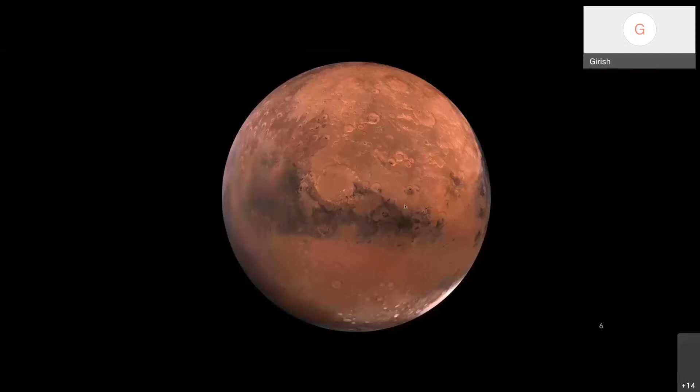But then in 2016, I started getting really interested back in this topic of sustainability and agriculture, primarily as a mechanism for helping sustainability. So if you ask me and my colleagues what we really are trying to do, we say we're trying to make terraforming robots. That's what we're trying to do.

People want to go to Mars, and NASA and Elon are all working on the rockets to go to Mars. But what we would like to do is create the AI and robotics technology that can help terraform Mars. But of course, we have to start here on Earth. There is a lot of terraforming that we need to do here right now.

The environment is in pretty bad shape, as you must have heard from many different sources. I'll try to explain a little bit about it.

Towards that goal, my group primarily works in field robotics, learning and autonomy, and we are a very diverse group of people from pretty much all the different departments on campus. What we work on is this idea of full stack autonomy - robots that can be autonomous in difficult field environments, which requires three types of autonomy algorithmic modules: control, perception, and planning. My group makes contributions across all three, and also with systems.

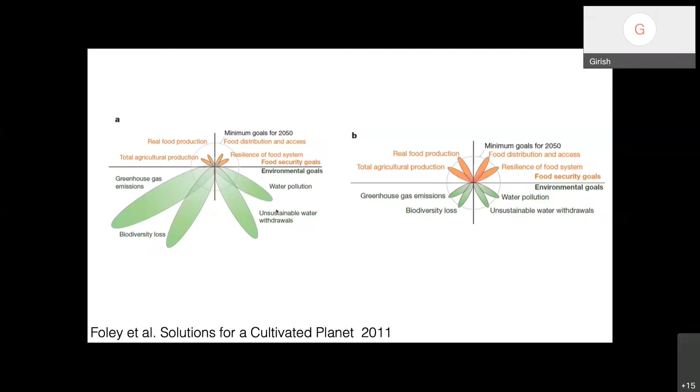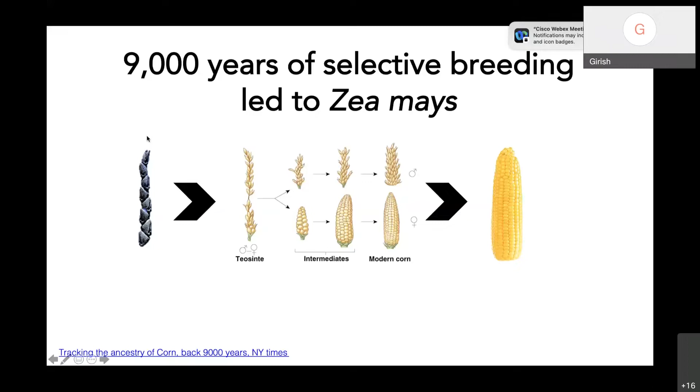But there is a very big need to accelerate the pace of this seed breeding right now, because in places like Africa and India, the yields are a third of what they typically are in more developed countries, and the population is actually increasing in those areas much faster. So how do you do that?

Geneticists and large breeding firms, industry in general, have been trying to implement methods like genome-wide associations. What happens here is they sequence all the genes of the plants of interest, and try to study the genotype-environment interaction. The genotypes express themselves as phenotypes. Phenotypes are visible traits of the plant, like plant height, plant width, how much yield it has, how resistant it is to certain diseases. And environment can include the natural environment, but also man-made things like chemicals and different management practices.

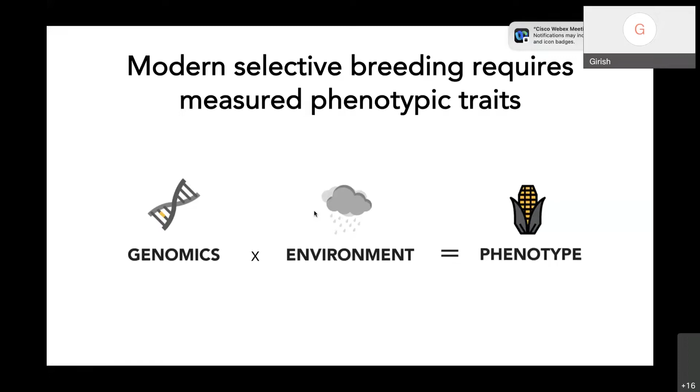Now the issue is that genotype sequencing is a solved problem now, but phenotype measurement is really not there. So what the breeders do is they plant these very large diversity fields.

They have to do this because there isn't a simulation model of the plant. So what they need to do is measure all of these varieties so they know which ones are doing better. From that perspective, there is a big bottleneck right now, called the phenotyping bottleneck, because all of these measurements are done manually. Not only are they time consuming, but they can often be inaccurate and literally impossible to make in some cases.

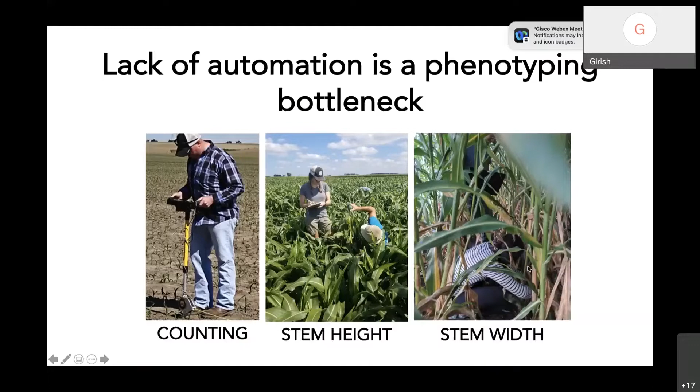You cannot go around and measure the width of stems of 40 acres worth of plants. It's simply not possible. So this has really slowed down the breeding pipelines. They could be much faster and much better.

In India also, there has been a lot of great work in plant breeding, especially in West Bengal. They have these varieties of wheat that can stay submerged underwater for 12 days. That's really cool, but all of this really needs to be accelerated with these types of measurements.

So how do you make these measurements? You can have gantry systems like this, which can potentially provide really high resolution and a lot of data, but they are limited in the area they can cover. Drones are really good, and they can cover a lot of area, but they don't really see under the plant canopy, which is where all the interesting action is happening.

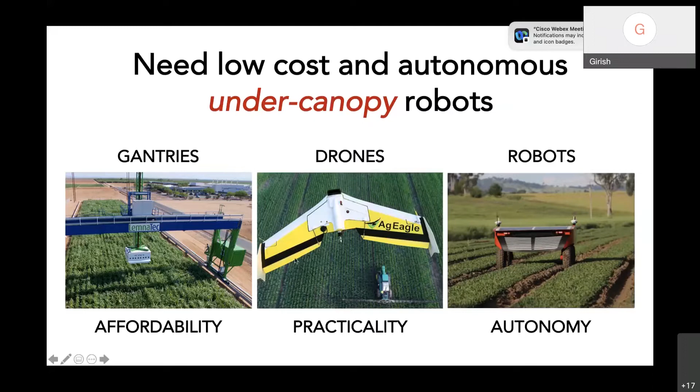So what we need is robots. And people have been talking about robots in ag since really early, since the 1980s. But the main issue, why we don't see robots everywhere in ag, is that the cost is simply too much for robotics today.

A part of that is the cost of making the robot, which actually should be less, in my experience, than the cost of making a diesel tractor, because you don't have a diesel engine. But the issue is really not that, it's the autonomy. You can make an electrically driven robot all day long, but if it is not autonomous, then it's kind of pointless.

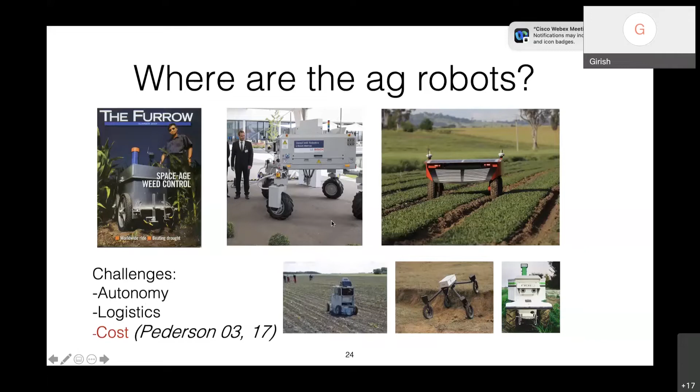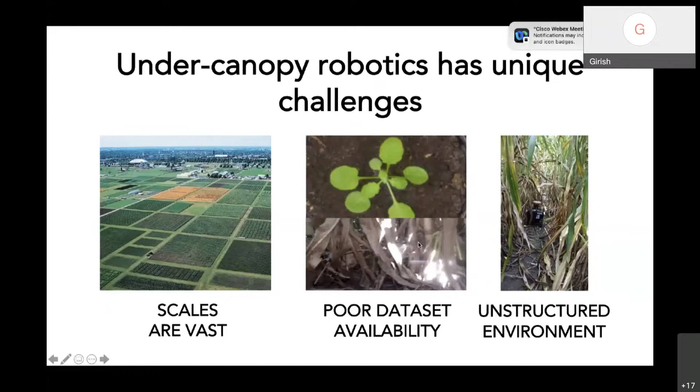And this autonomy problem is very difficult to solve because we have these very large fields. Data doesn't look very good when you are under the canopy, and these environments can be very unstructured. So since 2017, we pivoted from our drone work to try and solve these under-canopy robotics problems.

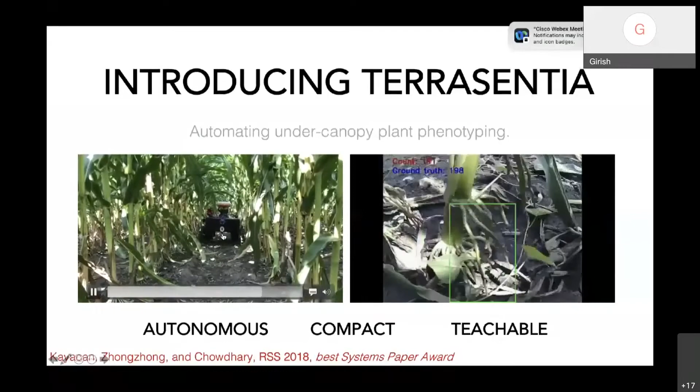In 2018, we had our first major paper in this area, which got the best paper award in the Robotics Science and Systems Conference, a premier robotics conference. The idea was that we can make very low cost under-canopy robots that are essentially 3D printed, and these robots can go and make measurements under the plant canopy that will be useful.

Let me explain the whole idea of this small form factor in robotics. In agricultural robotics, there typically has been a reliance on much larger robots. Like this one I'm showing is actually a smaller one, but many bigger robots have been there, and they have tracks, and people just try to replicate what large vehicles do in fields. But you see that they often have issues, like this one just ran over this sorghum right there.

So one of our ideas was to simplify this, and that came from our drone experience, where we said that if we could simplify these robots, then they will be easier to control. So in 2017, we came up with this idea of making a drone on the ground, a small lightweight robot that can skid to turn instead of having a complicated steering system. It basically just has 4 motors.

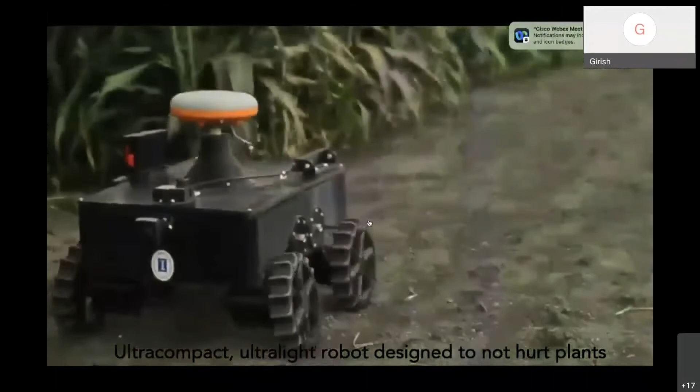Those are the only moving components. The rest is just electronics and sensors. This robot will give data that is at a very unique viewpoint compared to the data you can get from satellites or from drones.

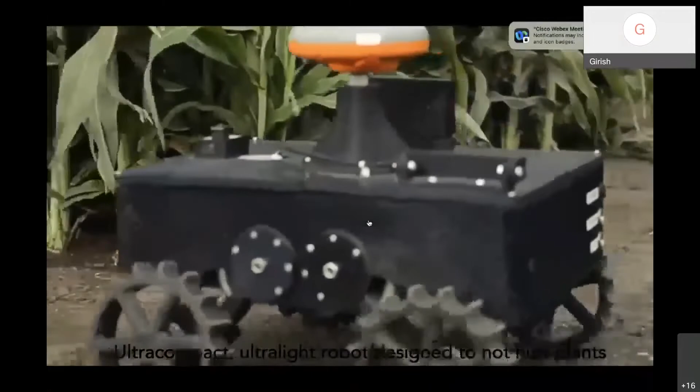Then what we did is we had a project back then called the TERRA-MEPP project, ARPA-E, which is like an advanced research projects agency, like a DARPA for energy. That project had a lot of focus on actually bringing technology to market and not just writing papers.

So what we did is EarthSense, which was already existing by then, which I had co-founded with my old friend Chinmay, pivoted to making these robots. We made 30 of these 3D printed robots and gave them to breeders and companies across the United States to ask whether this was a useful thing. They broke all the time because obviously they were 3D printed and not properly engineered per se, but the idea was to get the concept out and see if these robots made sense.

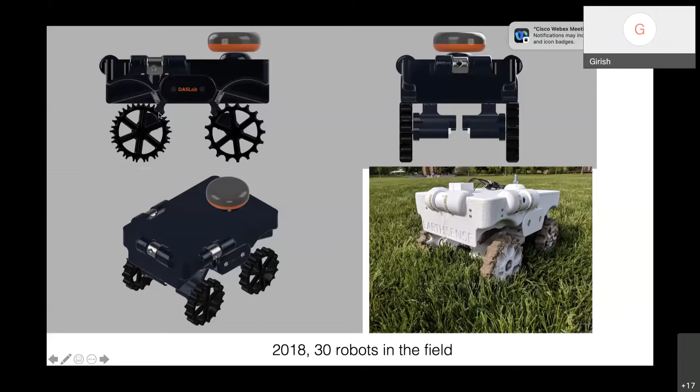We did believe that certain components could be plastic made, and we found out which could be and which couldn't be. And we did that in 2018.

In 2019, we basically went back to the drawing board and redesigned the whole system, making this monocoque chassis system where there's a plastic shell on top, a plastic shell on the bottom, and a metal shell in the middle, with metal struts that carry 4 brushless DC motors. Then every year we've been improving that. So that was the 2019 one.

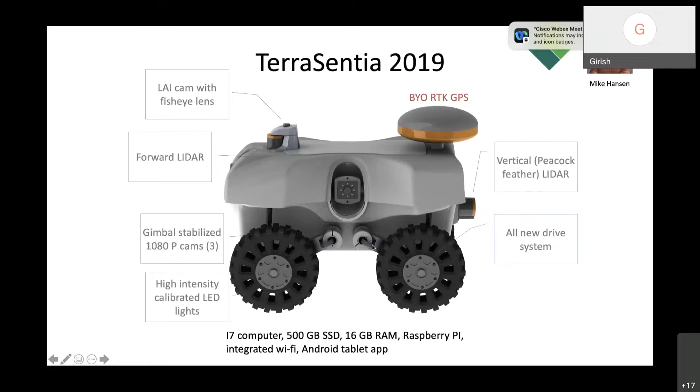In 2020, we refined the robot quite a bit. Actually, a number of these parts now get manufactured in India. The robot has 4 brushless DC motors, which I'll talk about in a minute. Along with that, it has 2 LiDAR sensors, 3 cameras, an RTK GPS receiver, and internally an i7 computer with lots of storage and another Raspberry Pi.

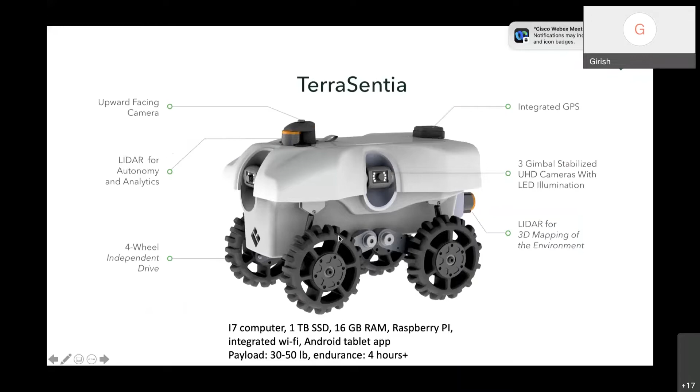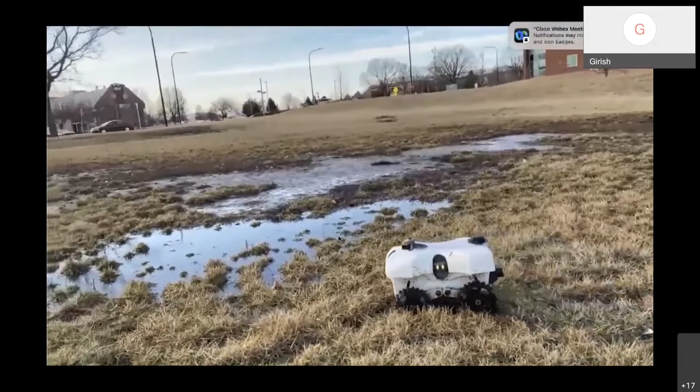So there are some innovations we made in creating this robot. The first was the shift to this drivetrain driven by brushless DC motors. These motors have become ubiquitous now because of the scooters you can buy for riding on the roads. At least in the US and Europe, this is very common.

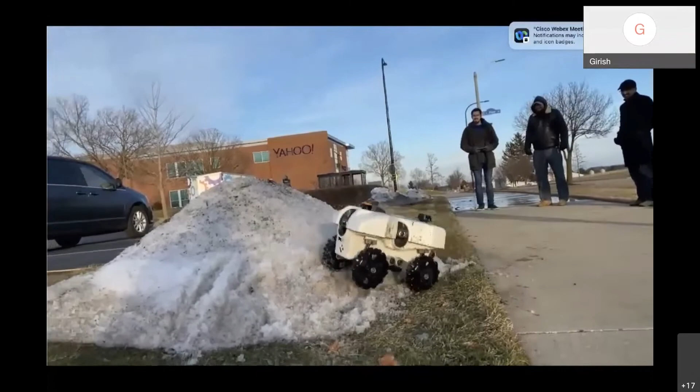Little scooters, like you just stand on them and go around. The cool thing about them is that brushless motors, as the name suggests, don't have brushes, and they use Hall sensors to detect where the stator is with respect to the rotor. In this case, the hub stays constant, and what is typically a stator in a normal motor rotates. That allows the system to be very simple, efficient in different ways, and it can tolerate water. That is the key thing, and it really helps with the design of these robots.

Since then, we've been testing this drivetrain system in a number of different environments, and we've surprisingly found—well, not surprising to us, but to a lot of people—that this system is actually able to navigate pretty much any terrain we can throw at it, as long as the robot clearance is there. Let me show you.

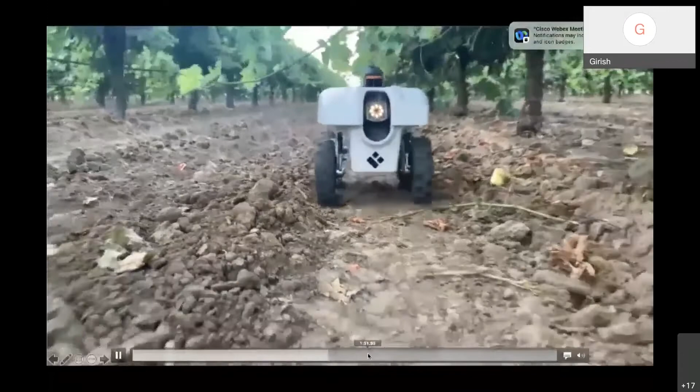We've seen all different crops by now. This is viticulture, so vines. Other terrains like this, and even those we can handle with a different modification to the robot.

But I like to show this video particularly to express this other philosophy we have when we make robots: we make robots for specific purposes, right? I think general purpose robots are not only hard to make, but they often live this life where you make this very expensive robot that doesn't really have a task—you have to hunt for one.

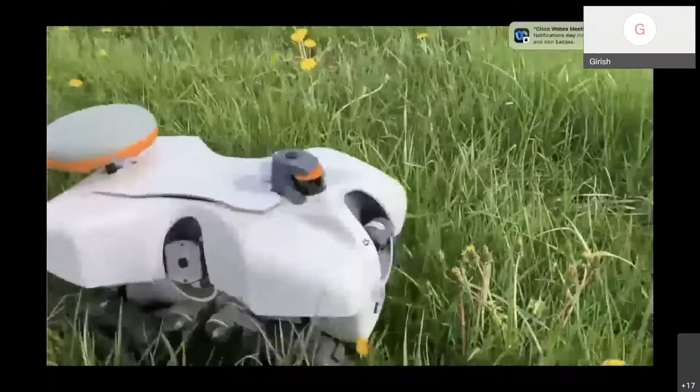So in situations like this, maybe it'll be difficult, but that can be fixed just by raising the height of the robot a bit if it's going to be a prairie robot. Other than that, there's been very little situations where we've found this drivetrain doesn't work.

What I really like about it—we've tested it in India also, this is chilies in India—is the compactness of the system. You can just put it on a motorcycle and drive away, right?

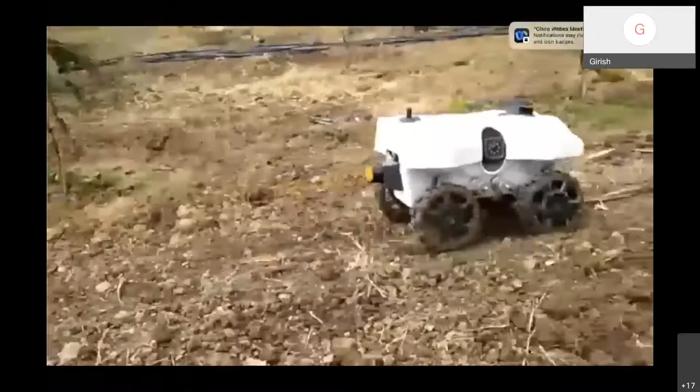So we think, by making it small in design, we made it very accessible, so people can relate to it really quickly. I found people from all different backgrounds are able to very quickly relate to it.

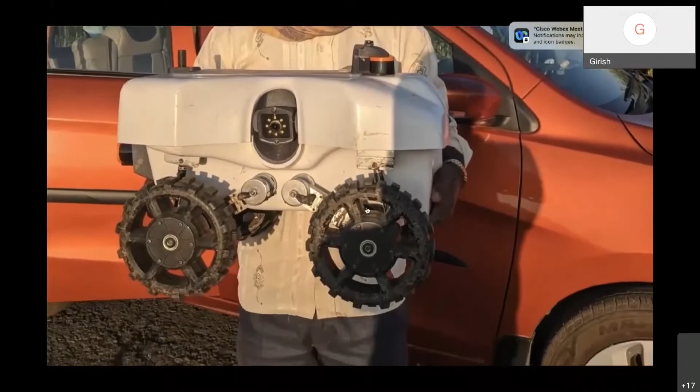The other point is—now this is the 2021 version, so we've upgraded the motors quite a bit—we often think small is not powerful, right? That's natural when you're brought up in the world of diesel engines, where you need a certain size of engine before you can make proper power. But electric motors are very different when it comes to the kind of power you can draw from them.

So now that we have the robot, the question is how do we make it autonomous? The place where everybody starts is GPS based autonomy. Everybody knows about GPS, it's in your phones now, but it works based off satellite signals, and primarily it needs a good view of the sky for the system to be good.

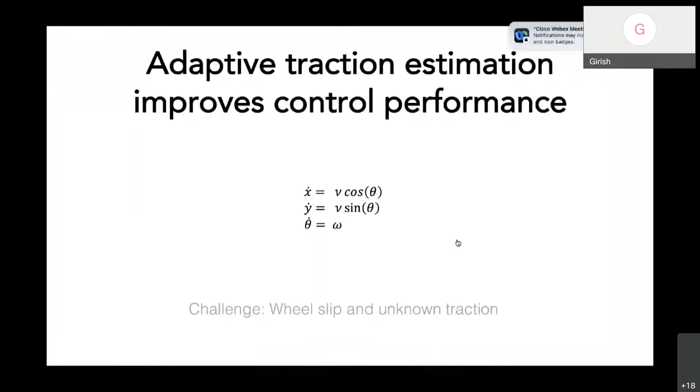There's a technology called RTK GPS which can augment the GPS signal, but again it also needs a good view of the sky. We've done a bunch of work, which I'll skip in the interest of time, that helps deal with mild loss in GPS accuracy and some uncertainty with respect to traction.

But the primary issue is that when you are under the canopy and very close to these plants - it doesn't have to be corn, it could also be like coconut palm - when you're under the canopy, you don't have good view of the sky, so your position accuracy is lost.

Irrespective of that, you have to navigate with respect to the crop that's around you, because it's a very narrow area. So you need to be able to do what we call reactive navigation, and the primary problem is this row following problem, where you need to find the distance to the row and the angle with respect to the row.

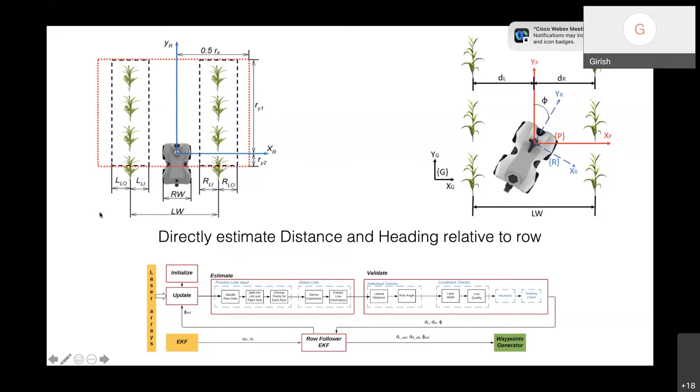That was the first problem that we solved, and the details are in this Journal of Field Robotics paper - coming up with heuristics to figure out how we can find these rows.

If you've seen LiDAR data with indoor robots, you'll often find that it's a lot cleaner than this. This was a very interesting and seminal paper because for the first time we can get these robots in these very cluttered, noisy environments. Some of these are leaves - it's hard to tell just from the LiDAR point cloud what is what. So it's a very challenging problem.

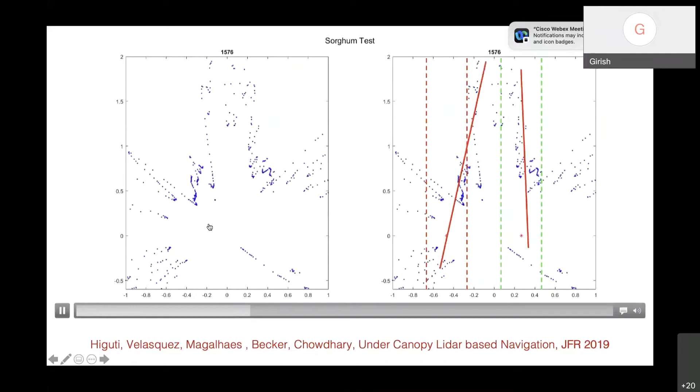Now we've been working on this quite a bit. One of the things we pride ourselves on in my lab is that we don't just write papers and forget about the work. Our focus is on really taking that technology and bringing it out into the real world. So we focus a lot on the impact.

These are the types of tests that we put our robots through - we put the autonomy algorithms on there and then really try to break them, so that we really know whether this is working or not. By now we've had many kilometers of this testing, and we also try to bring that out into the open.

EarthSense, the company, licensed this technology from the university and has gone out and made these robots. In 2021, EarthSense made 100 of these robots, and they do that high throughput phenotyping now - the problem that we solved. And this is now a product that farmers, breeders, and large companies can have access to.

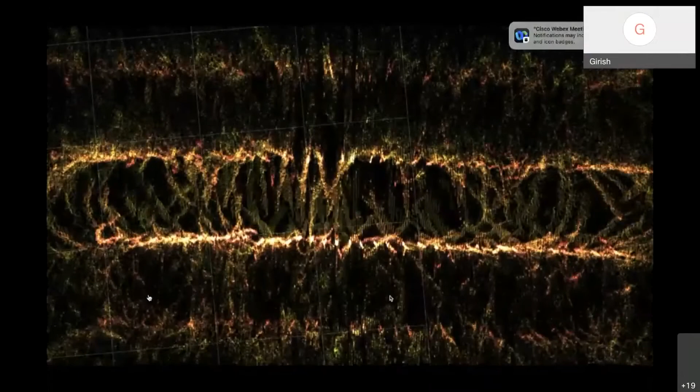I'm not going to talk too much about the details there, but very interesting and very strong results are coming out of what EarthSense has been doing. They have an office in India actually. And it's really exciting where this technology is going with the high throughput phenotyping.

And it appeared in the New York Times. There's really very interesting things, and I bring this up because very purposefully we have tried to position the robot and this idea of agricultural autonomy in a new, fresh perspective - something different, something that takes a novel look at how we can try to solve this agricultural autonomy problem, rather than just automating tractors. I mean, those are all valid ways of doing it, but in the long term, what we really want are new robots that are specifically designed for agriculture.

So that was kind of the story of the high throughput phenotyping. How do we bring this technology to farmers? That's the big question.

So we are in the US. The US is one of the largest producers of all kinds of grain and fruit and vegetables. It is primarily a result of the first and second green revolution, which also had a major impact on India. But primarily through the green revolution, the idea is that you have these better varieties of seeds, which we saw through the high throughput phenotyping can help.

But then the other part of the green revolution is you control pests and the environment through lots of chemicals, whether pesticides or urea, nitrogen. This industrial agriculture idea is basically to treat the land as a medium, and whatever nutrition deficiency there is, you just dump more nitrogen in.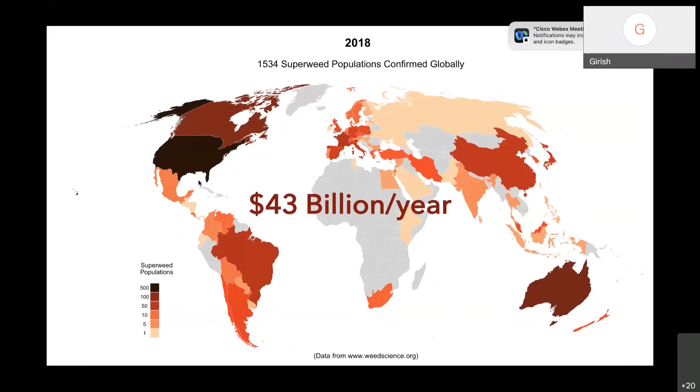In India, of course, farm sizes are small, so farmers are not able to afford large equipment. So they end up having to rely on manual labor a lot, and it's often exploitative and not really nice for the people who work in the farms. Not only that, it's very difficult to find farm labor. It's not surprising, right? Who would want to do this work when you can go into a nearby town and get much more pay for more comfortable work?

So overall, agriculture is in a major labor crisis, and it's funny too, because if you look at the US, the amount of money the farmer keeps has been reducing over time. On top there's commodity pricing pressure, and on the bottom there's the cost of chemicals they're using. Funnily enough, labor costs have dropped because like 62% of the US was into agriculture, and now it's only like 2%.

In India, it's still I think more than 50% of people are in agriculture. I may be wrong on the exact number, but it's a significant number of people. This has happened because labor has been replaced by equipment. So capital is equipment, and intermediate is all the chemicals and seeds. Funnily enough, the cost of land has dropped, because more and more marginal land is being brought back into production through the use of chemicals. So this chemical-intensive agriculture is becoming quite a bit of a problem.

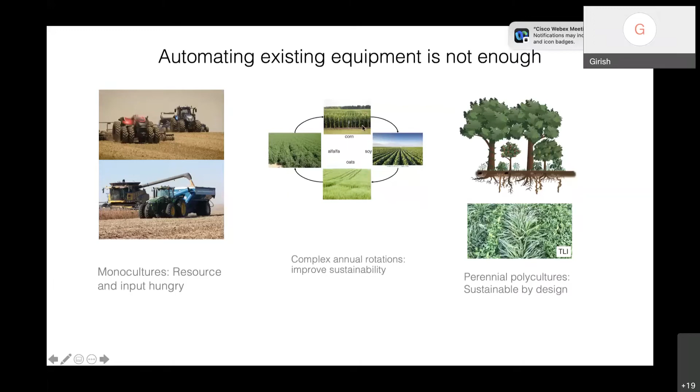So I'll give you one example. In the US, because of our season—we were just talking, it's cold here now—there's hardly any sun. For the next 6 months this will be the case. Until April there will be nothing growing from the ground, and in April everything will come back up.

So what they do here is, for all those months from October or November to April, the soils lay bare because they've harvested and there's nothing on the ground. That's really not good for the soil. There's no carbon being sequestered in there. So one way to fix that is to plant a green cover.

You can plant that and it just stays. You don't have to harvest it or anything. It just stays over the winter, serving as food for the microbes in the soil. It suppresses weeds, and then you can either plant across this cover in the spring, or you can kill it and then plant on that again.

The issue with cover crop planting is that it's expensive right now, and by the time farmers do it post-harvest with large tractors, there isn't enough sunlight for the cover crop to establish. So not a lot of farmers are doing it. One thing these small robots can do is go under the canopy and plant this cover crop. This is something we've been working on, at a very low cost.

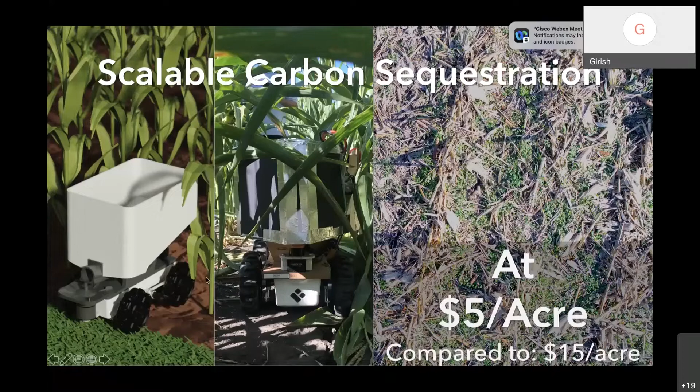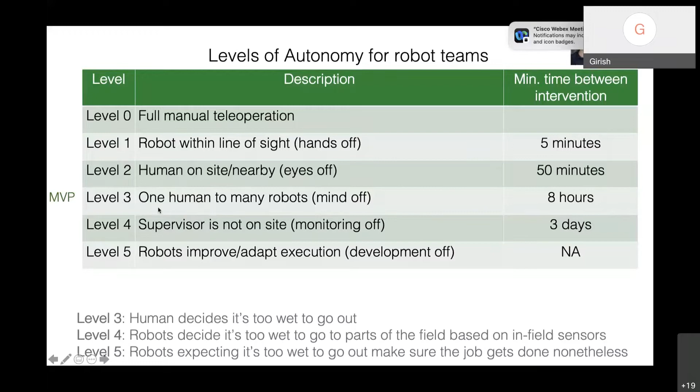The trick, primarily in agriculture but honestly in all walks of robotics, is that not only does autonomy have to increase, the cost has to drop. The cost of expensive sensors has to be replaced with better AI. Let me give you some examples of what we've been doing in this area.

On the robot we have this Intel NUC, which is an $800 component, and then there's this cheaper Raspberry Pi. What would be nice is if we could get rid of the NUC and get rid of the LiDARs, which are two other extremely costly components, and make a robot that only uses a Raspberry Pi.

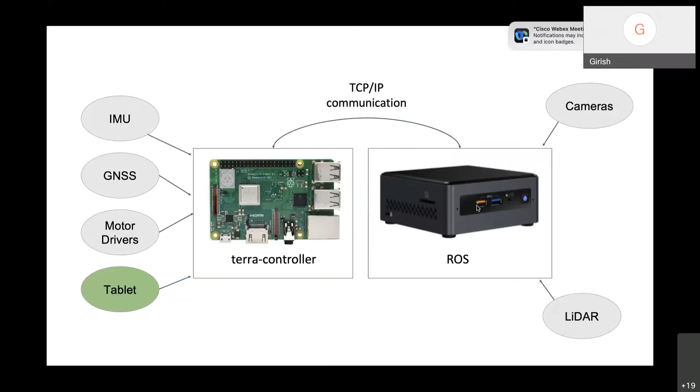For level 3 autonomy, the robot has to be able to follow these paths. As we know, in the row the GPS is not very good, so it has to use a different way of controlling itself there. When it's out of the row it has to use a different method, because the LiDAR isn't very good once you get out of the row. I'll skip some details — so how do you do that?

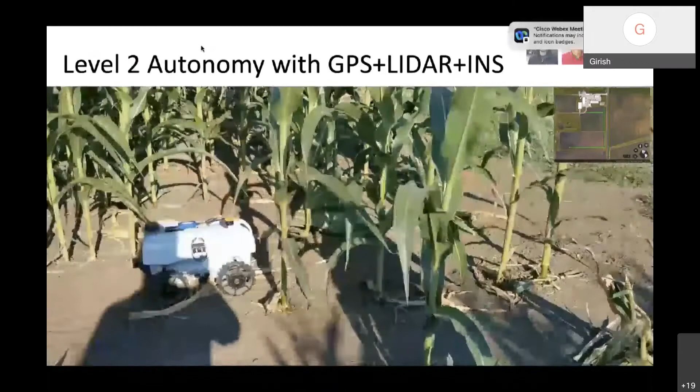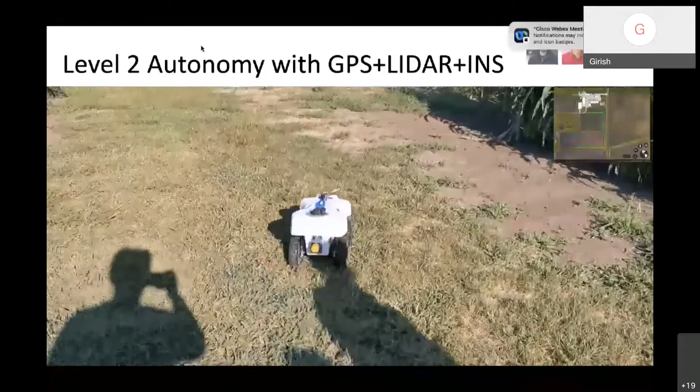One of the naive ways of doing it is basically a swapping system: you create a detector, an AI that's able to detect whether the robot is in the canopy or out of it. When it's out of the canopy it switches to the GPS idea, and when it's in the canopy it switches to LiDAR. Assuming those transitions happen nicely — which is actually a big problem — this will work.

This is the first thing we've been working on. We'll publish a paper sometime early next year on this, with a lot of field data. We think this is a reasonable way — not the ultimate way, but a good, reasonable way.

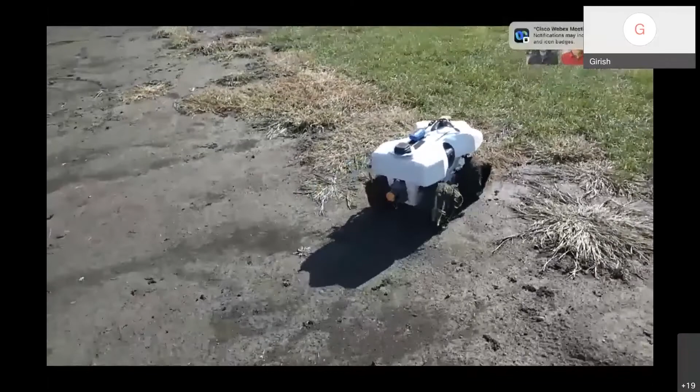The way it can primarily fail is when something changes on the robot. For example, in this case the wheels are all caked with mud because it was a muddy day, so the robot will potentially make a mistake when things like this happen. In this case, it actually doesn't make it into the row — it hits the side.

But we have some band-aid AI that's able to detect this and then try to do a recovery maneuver — it tries to come back and try again. This is happening automatically, and this time it makes it.

We've done a lot of testing like this now. One of the key metrics here is distance between interventions — the larger that distance, the more autonomous your robot is. To climb these levels of autonomy, you need to increase that distance to many kilometers. Right now we're close to a kilometer, which is pretty good, I think, for this. And remember, this is under a canopy environment, and these are controlled tests.

In practice, this is much better than the kilometer number, because that's a kilometer when it's always in a field, but more often rows are like 500 meters long, and then you come out and the whole thing gets reset. So practically it's doing much better than this, but this is one of the numbers we want to increase. The issue is, we've gotten it, and total distance now, many kilometers, many miles have been actually driven autonomously.

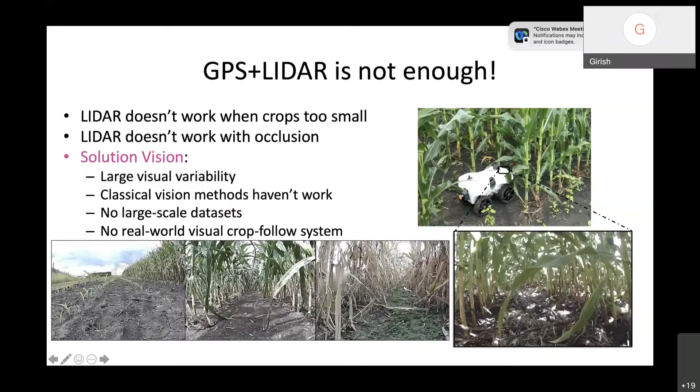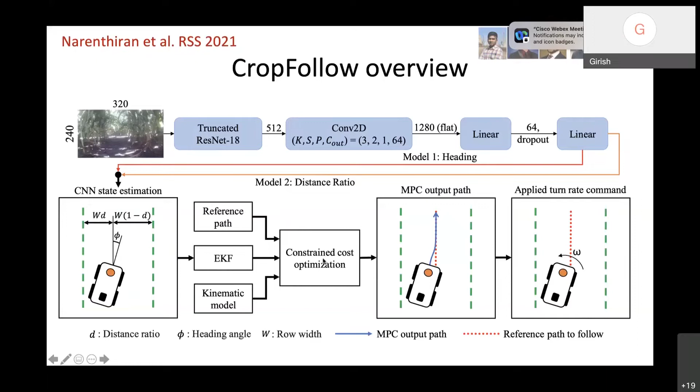So one of the things we've been working on with a number of my students and Professor Gupta is this idea of vision-based navigation. We published a paper, Arun, one of my students, published in 2021 at RSS, along with other authors, on using camera images to directly detect the distance to the row and the heading with respect to the row. I'll skip the details, but the idea is you get a 240 by 320 image, it goes through a neural network, and the robot directly tries to estimate a distance ratio and a heading. Then it all goes through the structured EKF-MPC type setup we had from before, which helps it follow the path.

For this, of course, we needed a lot of labeled data, and then correcting those labels. The labels are set using vanishing lines, which give us the distance ratio, and horizons, which we can use to get the heading information along with the vanishing lines. I'll skip some of that.

We've done a lot of validation of this in crop environments. In the paper itself we had 25 kilometers plus of validation, and that was based off the 2020 data, appearing in 2021. Since then we've done many more kilometers of validation, and found some very interesting issues. One of those is this domain shift issue — a lot of the time the camera calibration will change due to whatever reason, and the robot has to adapt to this new calibration. But other than that, this system is working fairly well, fairly reliably, with vision.

We are now able to basically bring the cost of the sensing down to $10 from $1,500, which would be the LiDAR, by using just the camera.

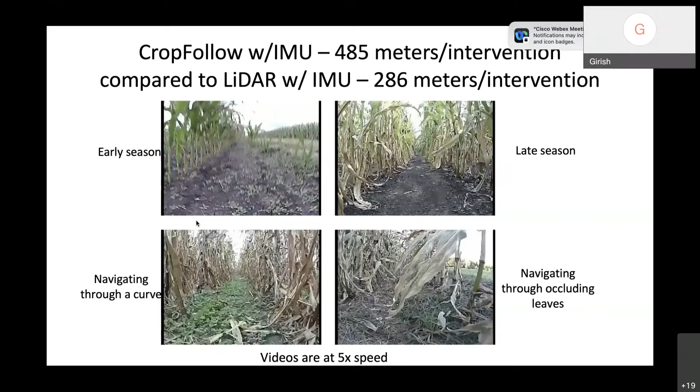And the cost of compute — working with our colleague Vikram Adve from computer science, we found that we can bring that cost down too. Hashim and Yifan, two of Vikram's students, led a study with my students trying to figure out how they can prune the neural networks to get them to run on smaller, low-cost devices. They found that even a Raspberry Pi 4 is sufficient to run it after pruning those neural networks.

So there's a very interesting space for good computer science research in this area, as to how we make these robots autonomous and practical. I do have to say that at some point I feel the robotics community needs to try to understand these issues too, because we often see all this autonomy work where everybody focuses on accuracy, and they don't really consider the cost of compute.

But agriculture is very good from that perspective, because it forces you to think about how much it's going to cost, what the lowest cost computer is that you can use, and how you can optimize those algorithms so they'll actually work on low-cost computers. This is something other areas in computer science have been doing quite a bit, but the traditional roots of robotics are often in control and similar disciplines, and there I feel people need to look out of the mathematical world into some of these pragmatic issues, because otherwise we're just going to be stuck in papers and never have impact.

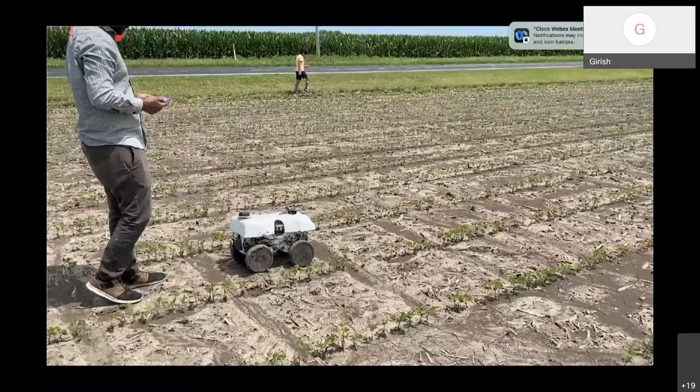So, anyway, this is Arun again, and he is now testing the system. This is the vision-based system.

As you can see, the crop is very small, and it also uses another MPC-based system developed by one of my students, Matthias, which is controlling the speed of the robot as well as the heading—whereas the earlier video only controlled heading. So it's very hard now to stop this thing. Arun really tries to make it basically a 50-degree angle with respect to the row at some point, but it's smart enough to brake and get back onto the row.

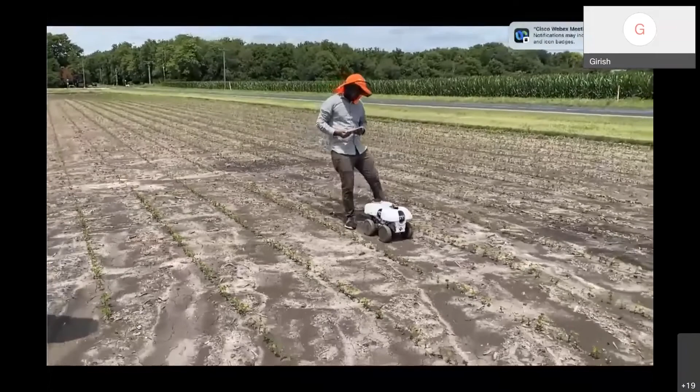These are very promising results. Work continues to go on, but we're starting to feel like this technology is at a point where it can really be brought out into the fields with more engineering, and that's what we're doing now. Some of this is licensed back to EarthSense, and they are trying to scale this up.

Just an example of how this is like a full path. You can see the GPS drops in accuracy. There are some collisions that the robot has, but it automatically recovers from them. So this is really coming together now.

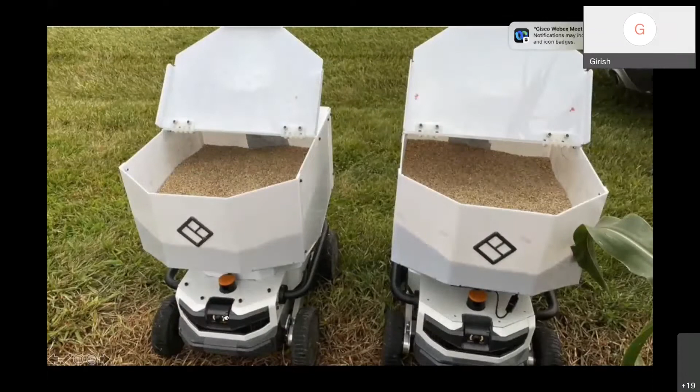I'll skip these videos in the interest of time. But like I said, we came to the point where we were able to make these cover crop robots in 2021, and they're off the same drivetrain, just a different form factor. The bin carries about 120 pounds, or 60 kilos, of seed, and it spreads this seed. The same thing can actually be used to spread fertilizer in India.

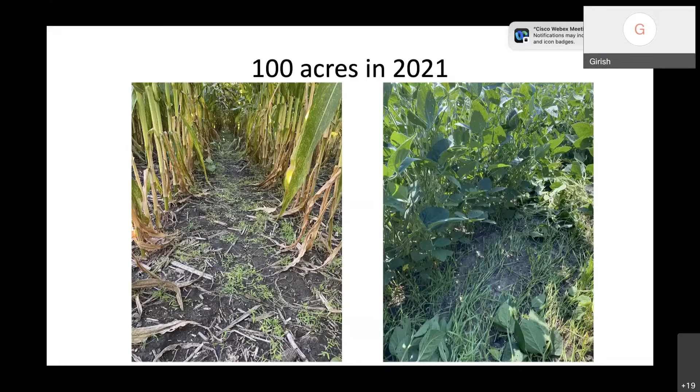I'd love to explore that a little bit more. But the key point with these cover crops is we can plant them in July and August, much earlier, and they emerge really nicely. We did 100 acres, 102 acres, in 2021. So again, using vision autonomy—although the autonomy needs to continue to be improved—it's very promising as to what we're able to get out of these things.

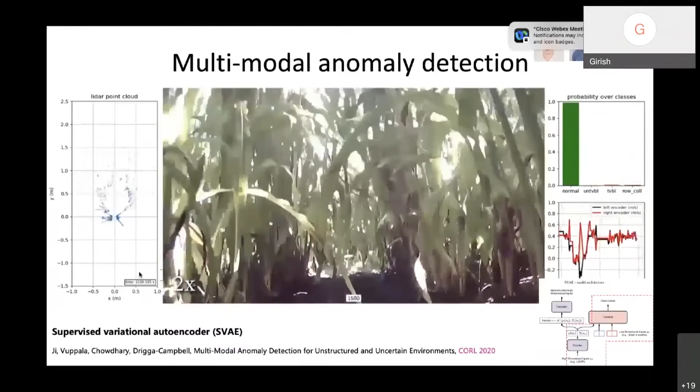I'll skip this—this is work by Katie Driggs-Campbell. It just shows what can be done. She and her students have found ways of figuring out geometric traversability through LiDAR data. And another of my students has been working on coordinating the robots for mechanical weeding, so the robots can figure out what the hotspots are in the field.

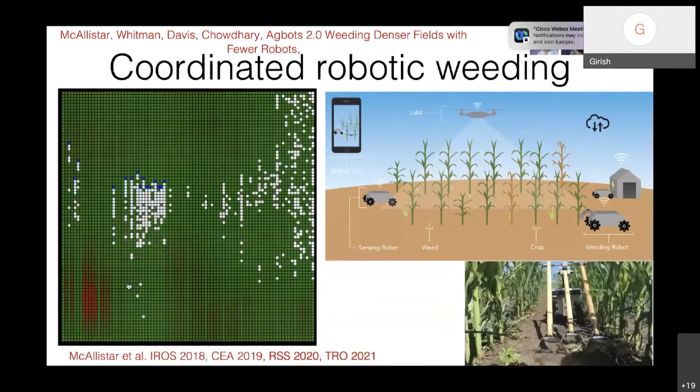So, Professor, how much time do I have? You can take your time. How long? How many slides do you have? 5 more minutes, is that okay? Yeah, please, okay, go ahead. It's very interesting, fascinating. Yeah, okay.

Let me finish by bringing the focus back to this idea of polycultures. I like to show these Bedouin polycultures in the oasis gardens in the desert. It's a great use of efficiency—there's a very limited amount of land available that has water in the desert, but there's ancient wisdom on how you can maximally utilize that.

We see this a lot also in India. You go to any farm, they won't just grow one crop like here in the US, because there's just not enough land. So they have to use multiple crop rotations, different types of species. Also, India is good because you get 3 seasons.

So how do you make that type of farming profitable? Tractors don't do it, because tractors are very good at scale but not good at dexterity. Humans, which is what we do in India and many other places, are very good at dexterity but not very good at scale. Our robots need to really improve and reach a point where they can scale and be dexterous.

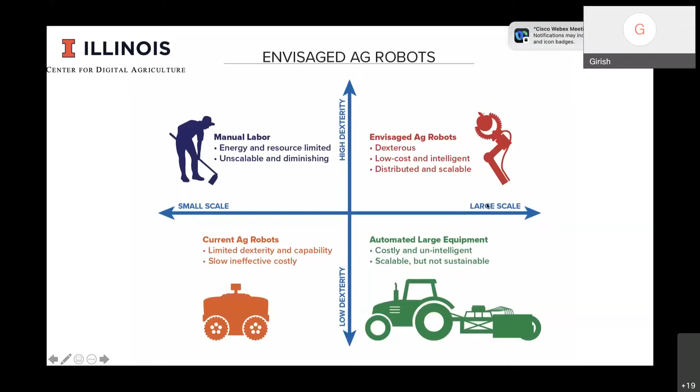One idea we've been working on with Professor Girish Krishnan is this idea of soft arms. These are basically tubes, similar to how muscles work in octopuses. You pressurize these tubes, and they have a different type of winding on them, and as you pressurize, they bend. By differentially pressurizing each of these tubes, you can get this soft robot to take different shapes.

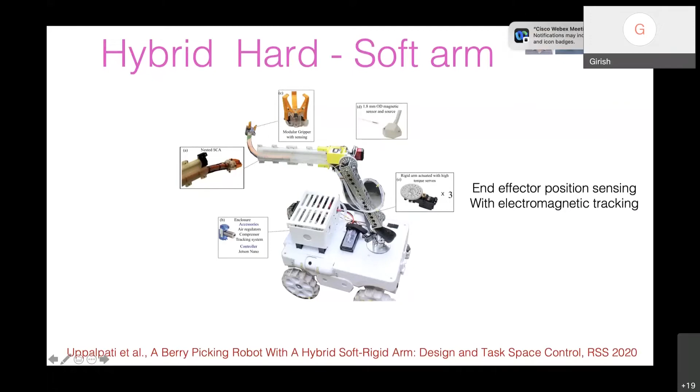Now the issue is that it's not very robust and stable. So one of the things we did at last year's RSS is to come up with this low-cost hybrid arm concept. There's a hard arm which only has 1 or 2 motors, and then the third is this soft arm, and we can get a lot more degrees of freedom with just these 2 motors than we would have gotten with a much more complex hard arm. That's good because you can bring the cost down and the dexterity up. So these are kind of the moonshot problems we're trying to solve.

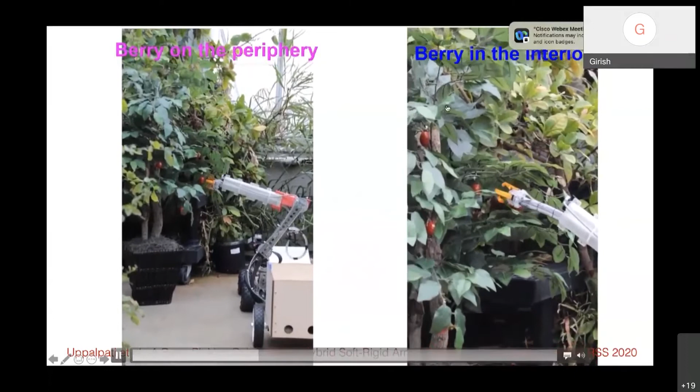So for example, you can go in there, and if the berry is far, then the arm can reach. Now in this particular paper, the position of the berry was known, but more recently, some of my students, Shivani and Samita, have written a paper trying to use vision to do some of these tasks.

That's coming soon. Let me finish by talking about, since I'm in India, I always like to bring it back to my birthland, how some of these technologies can affect it. In December 2019 and January 2020, before COVID, I visited Kharagpur with Professor Prasanta Guha. We taught a SPARC course on AI and machine learning, and I had a chance to visit other places and get an idea. These are numbers that I've come up with.

There's a huge population that works in agriculture, and it's a pretty big contribution to GDP. But the main issue is that most of the land holdings are small. As a result, there's this idea we've been thinking about: how do you provide appropriate scale mechanization for these small farms?

Talk to anybody across India, you'll always hear these issues about labor, which is surprising to some Western countries, because they think there are a lot of people in India who all want to work. But the thing is, it's not like people will do any job that's there. People work because they want to improve their standard of living, and working out in the 40-degree sun in India isn't considered an ergonomically pleasing job when you have the option of working in air-conditioned offices or homes.

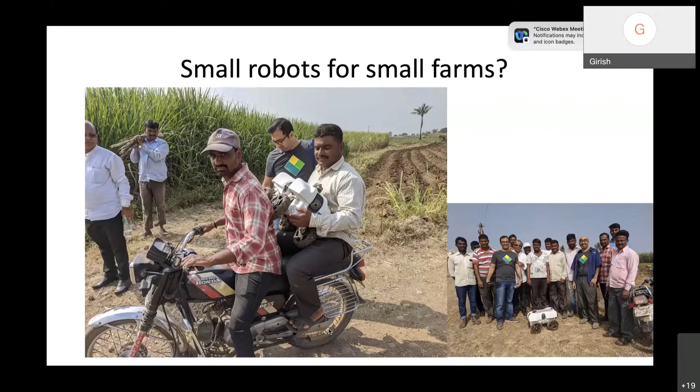But the good news is that these robots are able to navigate these environments, and we've used them for scouting. We're starting a project in Pune, hopefully pretty soon, to bring some of these technologies out.

If I want to finish the talk with where I think the big PhD-level problems are, and also for industry, what we need to solve: first, we need to deal with this idea of traversability, in the sense that we shouldn't have to set waypoints for the robot to navigate. That's just not, I think, a practical way of doing navigation in fields.

Second, we need to deal with all these edge cases. Most of the time the autonomy will work great, and this is one of the main reasons why big tractors are not fully autonomous yet, but there are always these weird things that happen that you need to deal with.

Transferring between different crops, different cameras, different robots is important. Plant manipulation is a huge problem too, a pretty large portion of my group is actually now involved in that.

Then improving reliability using multiple sensors, improving fault tolerance, being able to just randomly swap things, and of course cost reduction, bringing costs down even further. Our goal is to make robots that cost less than $500 to make, less than a tractor to make. That should be the idea, right? And then multi-agent coordination, human-robot interaction, and edge learning.